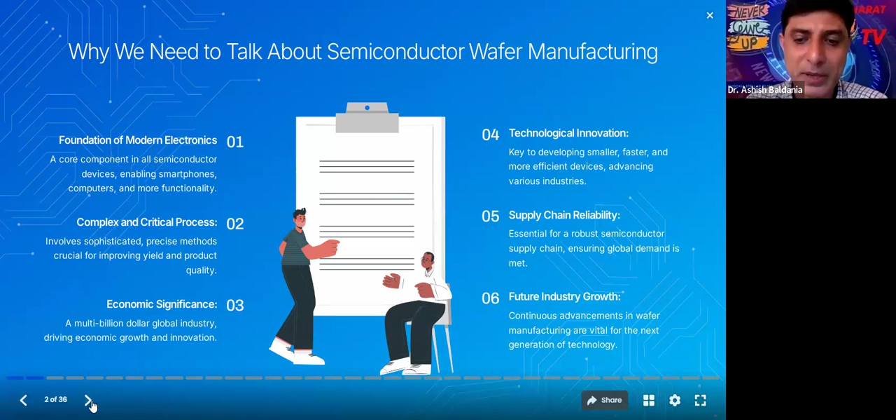The sixth one is future industry growth. As we know, in the semiconductor industry Taiwan is the pioneer, and most semiconductor chips are imported into our country from Taiwan as well as other countries. But if we need to grow fast, we need to cope with that industry and have it situated in the country so that future energy demand can be met and future industry growth can happen. So these are the 6 points I highlighted on why we need to focus on semiconductor wafer manufacturing.

So this is the overall scenario of how the wafer is produced from the sand. The chemical formula for the sand is SiO2. From sand, the next process is metallurgical grade silicon, then electronic grade silicon, or we can say polycrystalline silicon, then the CZ method or Czochralski method, then single crystalline silicon, and finally we reach the wafer. So there is a series of processes involved in manufacturing the wafer.

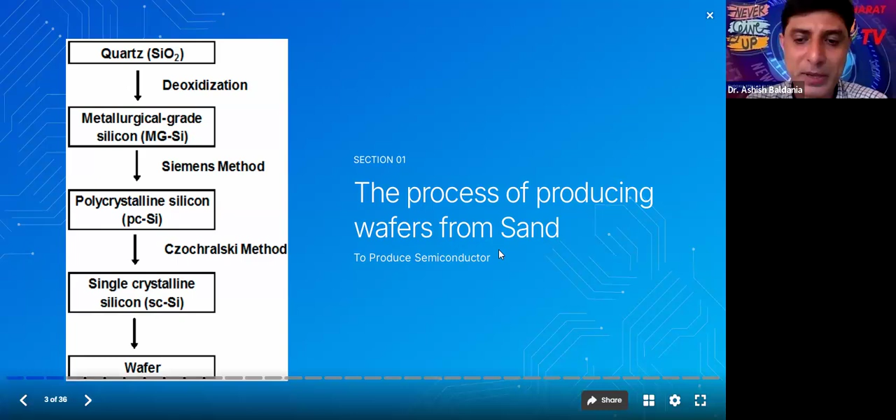So the wafer is the in-between point. If we need to produce the semiconductor, there are several processes available which can install the chip onto the wafer and produce the particular device which can be used in electronics as well as in vehicles. So today I'm only discussing sand to wafer, that is the intermediate part. If we really want to go for semiconductor wafer manufacturing, there are several other processes. So in this particular slide, I have included sand to wafer.

Now, as you know, sand is available on the earth, which is also known as silicon. Silicon or SiO2 is the chemical formula. So the first step in semiconductor manufacturing is to obtain and purify the silicon. So where can we find the silicon? We can find the silicon from the sand. It is the most abundant element in the earth's crust, typically found as silicon dioxide. So the sand is also known as silicon as well as SiO2, which is available on the earth. This sand is not in a purified form. It is not in the pure form we need.

It is available at maybe 98 or 90% purity of silicon, but we need to convert to 9N, that is 99.9999999. Up to that much purity, we need to convert this sand which is available on the earth to the wafer. So you can see that from 98 percent to 99.9999999, that is the 9N, we need to convert from sand to the silicon. Now the raw material is the sand. It is the starting material available on the earth. We need to transport the ore by mining to the industries. So this is the first step.

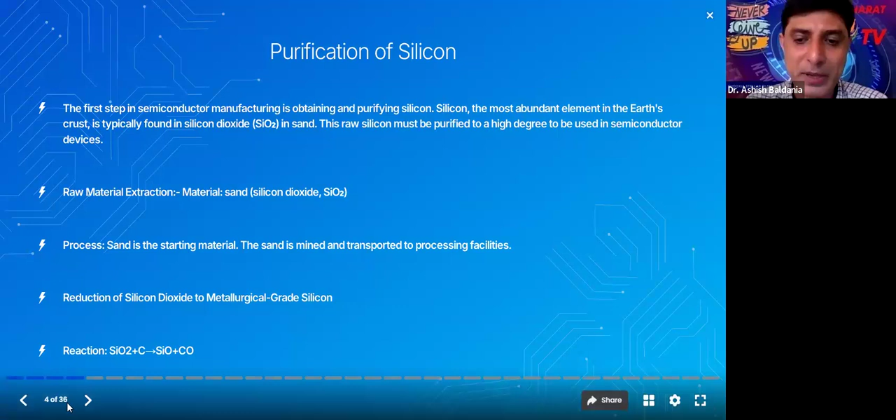Now the second step is from sand, the raw material, convert into metallurgical grade silicon. So this is the first stage, and the reaction is SiO2 plus C gives SiO plus CO. We will discuss that particular reaction. So our first stage is transforming sand, or silicon available on the earth, into metallurgical grade silicon. Now, how can this metallurgical grade silicon be produced? The first step is you require the electric arc furnace. I will show the figure in the next slide.

In it you need to add sand, and with that we need to add some reducing agent. Reducing agent means you can go with carbon, or with coal or coke in which carbon is present. So the first stage is we use the electric arc furnace in which we add sand with the reducing agent, that is the coal. So the combination of sand plus C will give metallurgical silicon. This mixture enters the electric arc furnace at 1600 to 1780 degrees centigrade to 2000 degrees centigrade. These are the various stages at which we heat this mixture, and because of that, the reduction reaction can happen inside the furnace.

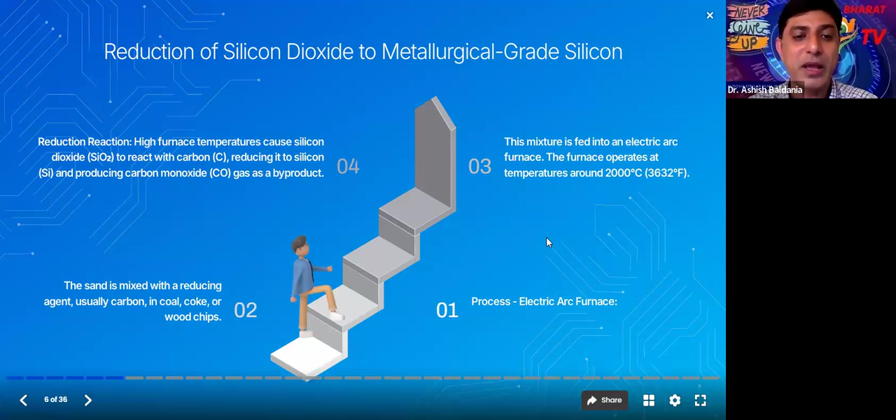So the high furnace temperature causes silicon dioxide to react with the carbon, the reducing agent, to produce silicon, and the byproduct is CO. So earlier we have SiO2 along with the reducing agent, carbon. With the high temperature, we can produce metallurgical grade silicon along with the byproduct CO. From an environmental point of view, carbon monoxide is hazardous, but we need to establish another industry to overcome this situation. As the main agenda of this INFES 6.0 is environmental science, we need to focus on this.

So this is the submerged arc furnace in which the sand as well as the reducing agent is added. First we give 1600 degrees centigrade temperature, which converts SiO2 plus carbon to SiO, that is silicon oxide, plus carbon monoxide. Then it reacts with 2 carbon and produces SiC plus CO, and this SiC, silicon carbide, along with silicon dioxide will produce silicon plus SiO plus CO.

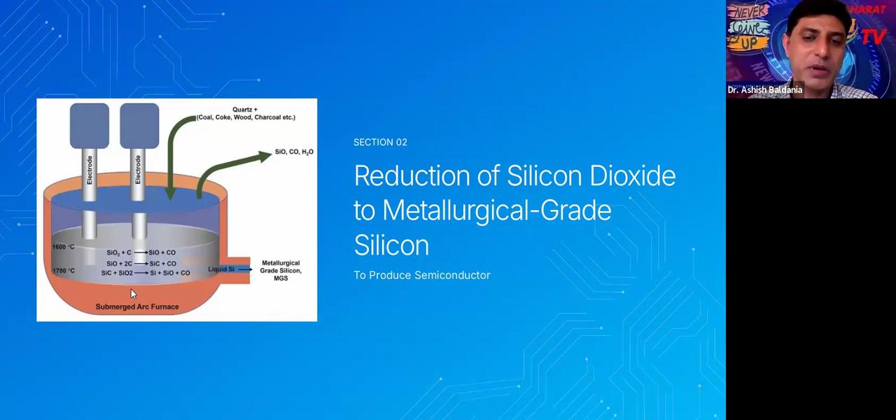So our main focus is the Si. So from SiO2, the first stage is to convert to metallurgical grade silicon, that is the Si. From the bottom, liquid Si can be found and converted into metallurgical grade silicon. So this is our first stage, from the sand to the metallurgical grade silicon.

Now our second stage, from sand to metallurgical grade silicon to electronic grade silicon. In every step, we are trying to increase the purity of the silicon. Earlier we had 98% silicon in the sand. Now we are going towards 99.99. So the objective of this process is to convert the metallurgical grade silicon to the electronic grade silicon.

So in electronic grade silicon, we nominate this particular silicon as the trichlorosilane, right? So that is EGSI. EG means electronic grade silicon, Si to trichlorosilane, that is the electronic grade silicon. So this is our agenda, to reach up to 99.99.

In trichlorosilane production, it reacts with hydrogen chloride. If we use hydrochloric acid, then we need to go with the liquid, but in this particular case we are using gas, so we nominate it as hydrogen chloride. So the metallurgical grade silicon will react with the HCl at a temperature of 300 degrees centigrade and convert into SiHCl3, that is the trichlorosilane.

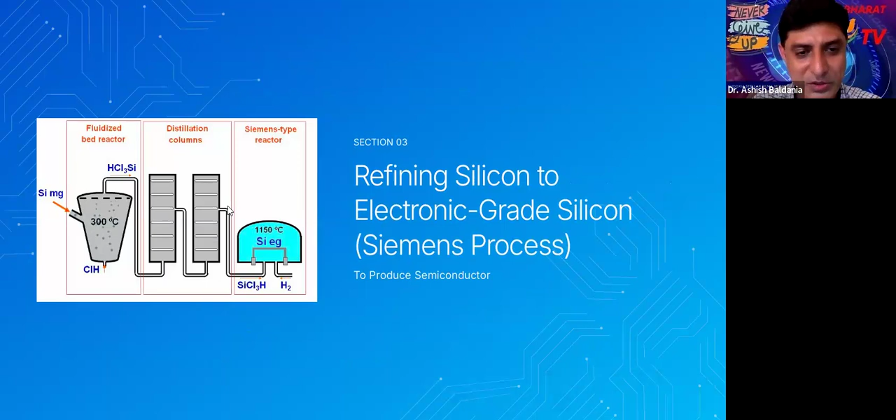The earlier process is the fluidized bed reactor, at 300 degrees centigrade. That mixture is added into the distillation column. The column purifies certain materials, which are added into the Siemens type reactor. This electronic grade silicon process is also known as the Siemens process. At 1150 degrees centigrade, SiCl3H and hydrogen are added, and the Siemens process gives the electronic grade silicon.

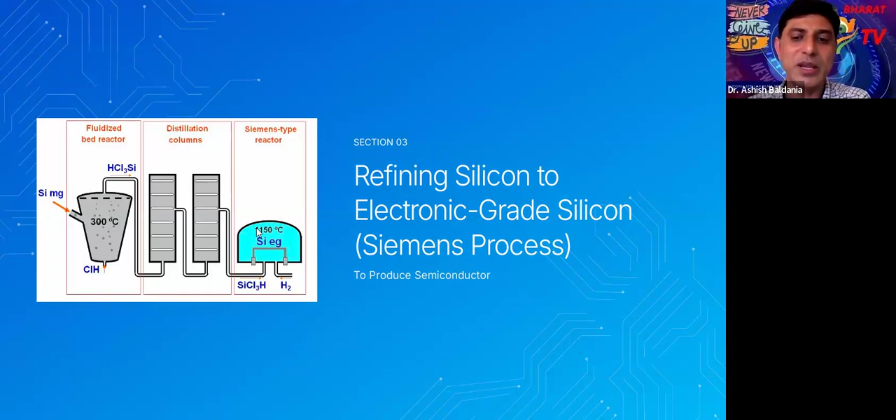So we have completed two processes: first the sand, then metallurgical grade silicon, and then electronic grade silicon. Now the question arises about single crystalline, polycrystalline, or monocrystalline. So we need to understand the difference.

So this is the basic difference. In single crystalline, the materials are properly aligned. In polycrystalline, materials are not properly aligned; they are irregular. Now, silicon is basically of two types, as I already told, polycrystalline and single crystalline. Polycrystalline has grain boundaries or impurities, which is why it is irregular. In contrast, single crystalline has no grain boundaries and is regularly placed.

Now we come across the word ingot. To produce that particular ingot, we need to go with the process known as the Czochralski (CZ) process, also known as crystal growth, or single crystalline silicon. Whatever silicon is available as electronic grade silicon will melt in the crucible, which forms the crystal. I will let you know in the next slide. This particular seed crystal is slowly pulled up while being rotated, and you can form the ingot.

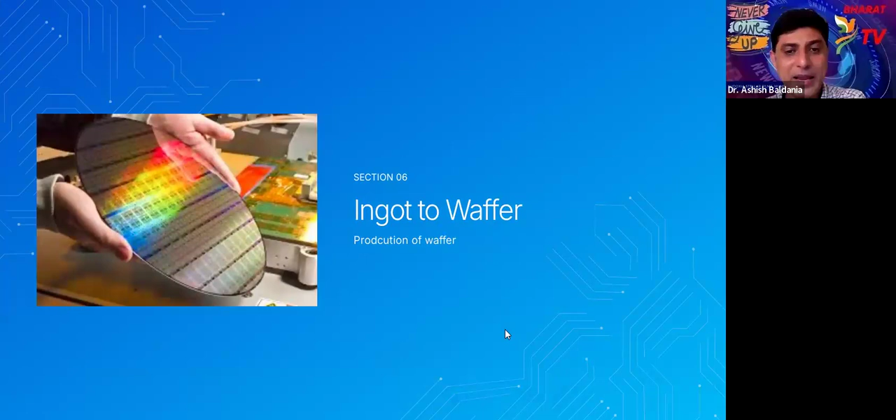As you have seen in the earlier figure, we formed one conical cylinder, that is the ingot. Now this silicon ingot will be cut with the help of a specific material. We have the ingot in crystal form, but silicon is very hard and brittle, and because of that we use industrial grade diamond to cut the silicon ingot.

Our first step is to remove the end conical shape from the ingot. This cannot be cut with a simple material; for that you require diamond grade material. From both sides you cut down the conical shape of the silicon ingot with industrial grade diamond. This is the first process of ingot conversion. Converting silicon ingots into polysilicon wafers requires some machine and chemical operations, which we will also see later on.

And the trimming. The first shaping operation is ingot trimming, which removes the seed and the tang ends from the ingot. Then you need to do the grinding. After cutting down the conical end shapes of the ingot, you do trimming so that the diameter can be a precise size, but it is still irregular. To correct that irregular diameter of the ingot, we need surface grinding.

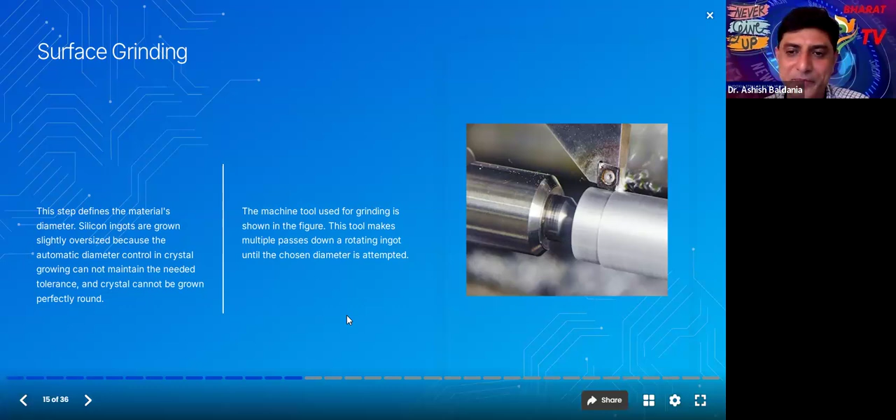In this step the ingot is slightly oversized, because automatic diameter control in crystal growing cannot be maintained. In the CZ process, we directly dip the material and produce the ingot, so we have an irregular shape. Now we convert it into a regular shape with a specific diameter, which is known as surface grinding. Then the next step after the ingot trimming that we have already seen.

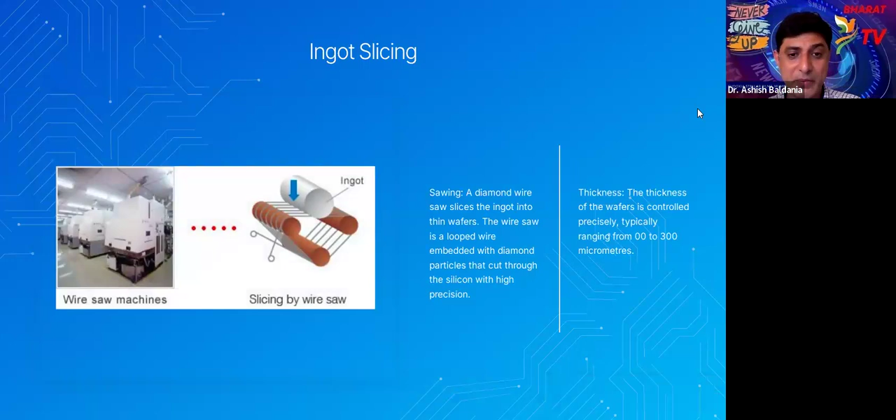Now we have one cylinder with a specific diameter. Now we are moving slowly towards the chip manufacturing or wafer manufacturing. So the upper part is the ingot, in the white color, and below are the three cylinders which are circulated with the wire. That is known as the diamond wire. As we have already seen in the earlier slide, this particular silicon ingot is a very brittle and hard material which cannot be directly cut with a simple material. So for that you require the diamond.

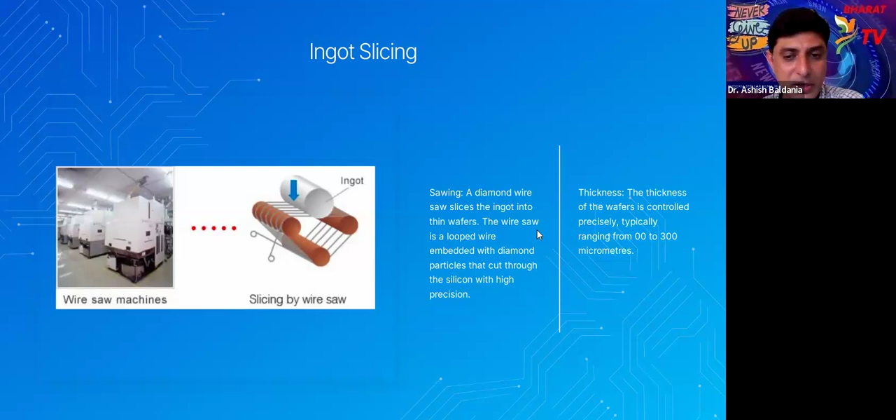So the wire which is circulated around the three brown-colored cylinders is continuously rotating, and the ingot is pressed from the top to bottom, and that will convert the ingot into various different sizes of circular-shaped chips or wafers. So we are moving towards the wafer production. This is known as the ingot slicing.

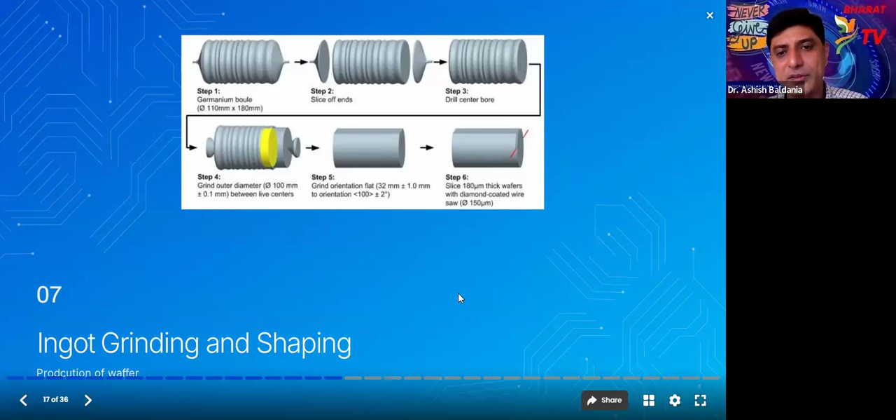So there are various orientations based on the manufacturer, the application and the requirement of the customer. We need to fix the orientation of the silicon wafer. So we give various names, that is P type or N type, P type 111, P type 100, like that.

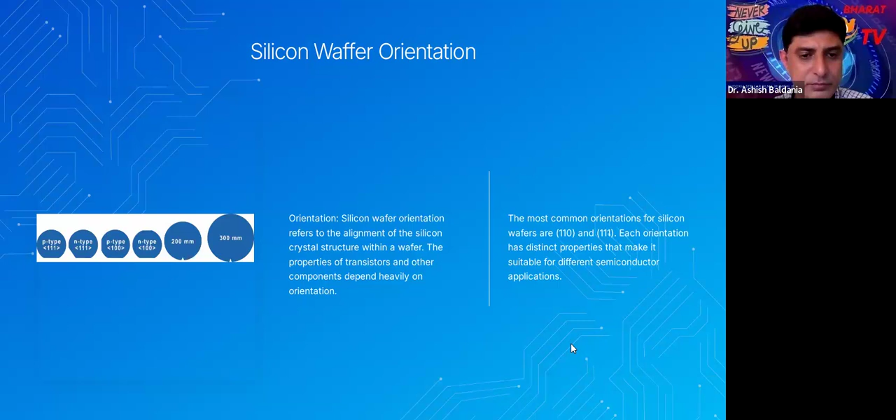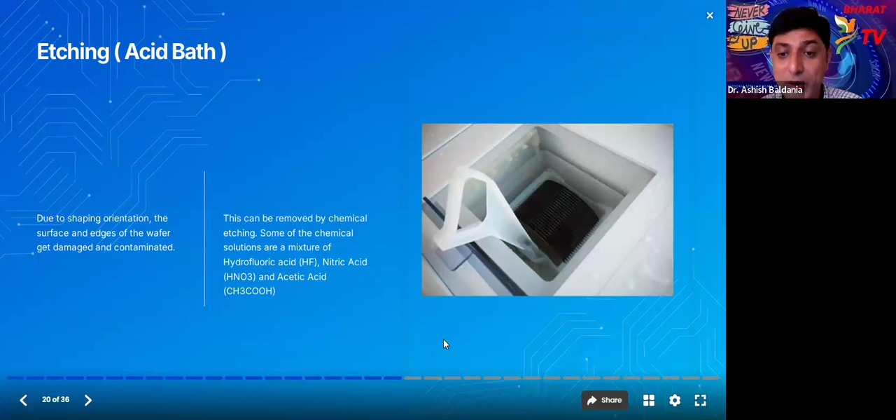With the help of this mechanism, we are polishing the surface of the wafer which came from the acid bath. So that is another process in which the damaged surface from the acid bath is smoothened, and for smooth polishing we are doing this particular process. This is known as wafer polishing.

And finally, after wafer polishing, we need to do the wafer cleaning. As you can see, the solution enters onto the surface of the wafer, and this chemical solution will remove the organic material. Even after polishing and the acid bath, there is organic material present on the surface of the wafer, and to remove that organic matter, we need to add a mixture, that is ammonium hydroxide with hydrogen peroxide, HCl H2O2 and H2SO4 H2O2. With the help of this chemical solution, we can remove the organic impurities on the wafer.